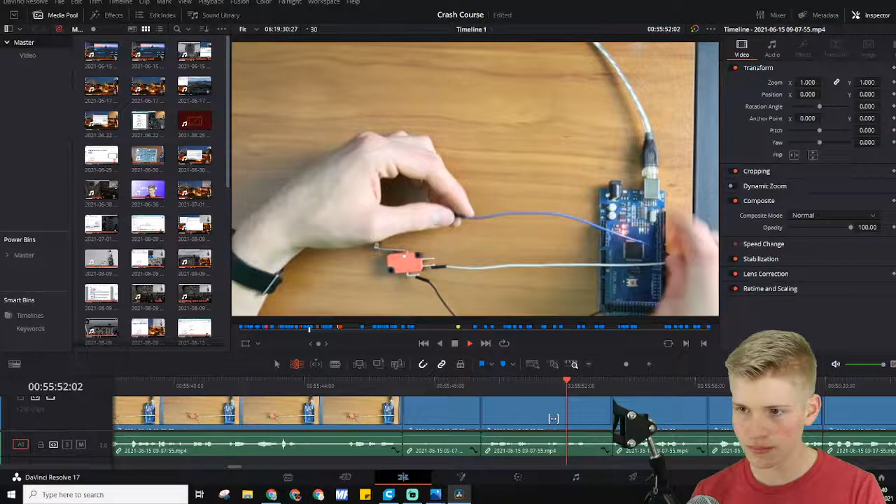But yeah, I'm really excited to launch the course. I can't give any deadlines. I did give a deadline a little ago, and I think I missed it because I said the 25th. It's really difficult to do a video like this, and I admit I'm not the best at keeping deadlines for large projects like this. I also said that I would get a 737 simulator done in 3 months. That was kind of a laugh, too. That was hilarious. These things take time.

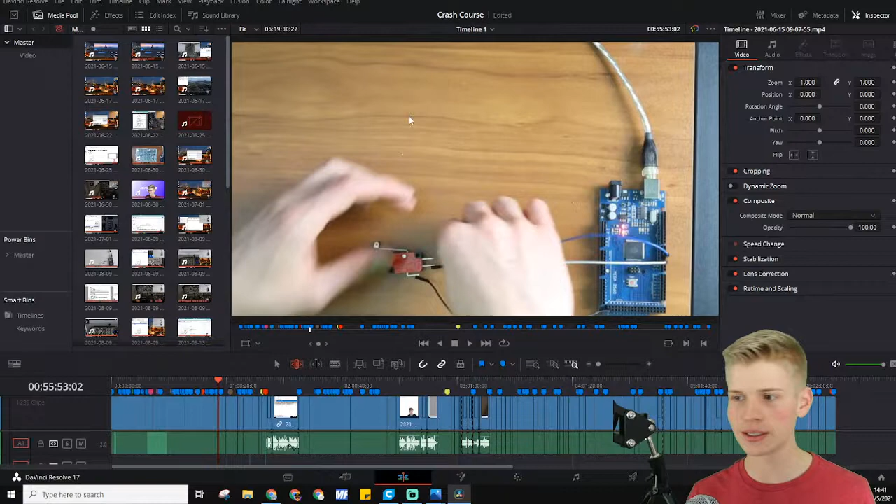All right. Oh, I was gonna pull something up. This is good being live. I enjoy this.

Oh, and for the crash course, I just showed the 6-hour crash course. I'm thinking about doing it as one big video initially, and then also having a playlist that's all split up. And I think that'd be the best way. So you don't have to watch the entire 9-hour video or 6-hour video. You can also watch it broken up into a playlist. So I'll be doing both of those. It'll be pretty interesting to see how it goes.

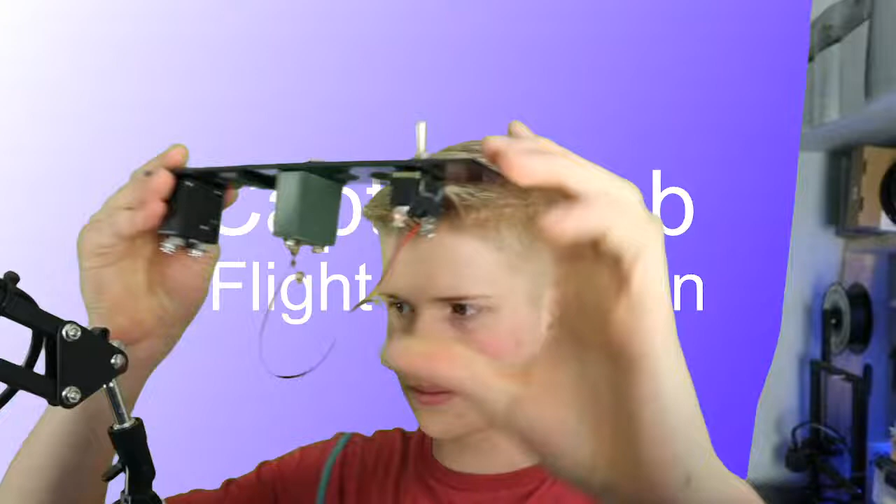Let me give you a progress update. I think that's really where these live streams shine. So this is what I've been working on most recently. Let's see if we can get it to focus. That's okay if it doesn't want to. But this is a circuit breaker. There are 4 types of circuit breakers. Actually, this one's a switch. It doesn't count. So there is the actual aircraft circuit breaker.

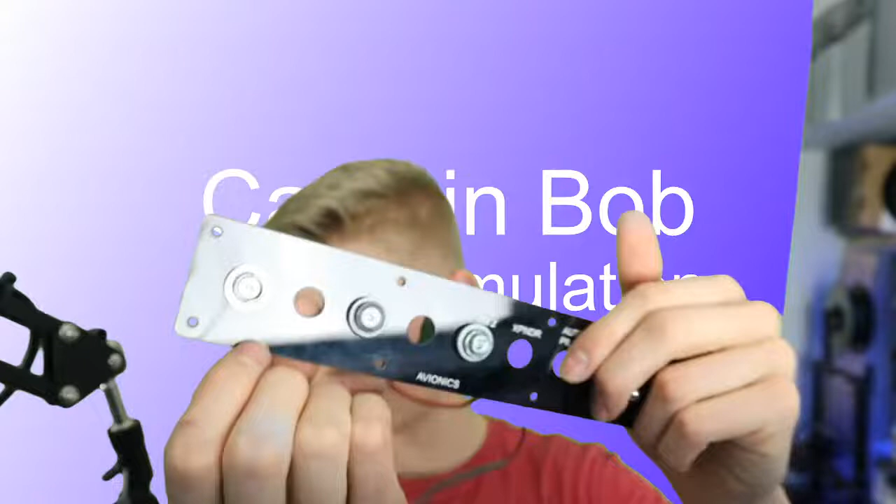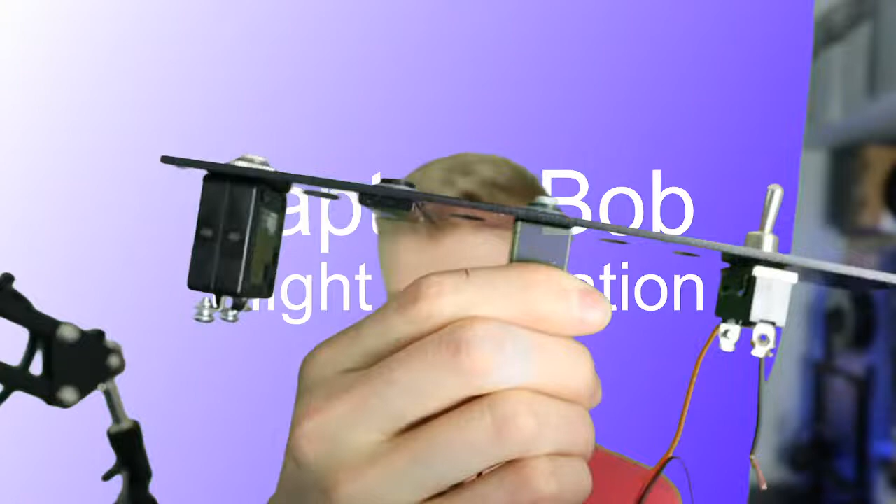I'm going to hook this up really quickly. How do I do that? So I have a 12-volt power supply. I'm not going to show you how I'm hooking it up because you will be disappointed, and I don't want you to try it at home. No, it's safe because it's 12 volts DC. Even if you did touch it, you would be fine, and it's a low amperage. It's not the voltage that kills you, it's the current.

So, once I plug this in, I have this all hooked up and stuff. Oh, that came unplugged. Let's get this over. There we go. So here is the solenoid switch circuit breaker. So this is popped out when it's up, and then when I turn it off, it pops down. So you can see it from here, pops up and pops back down.

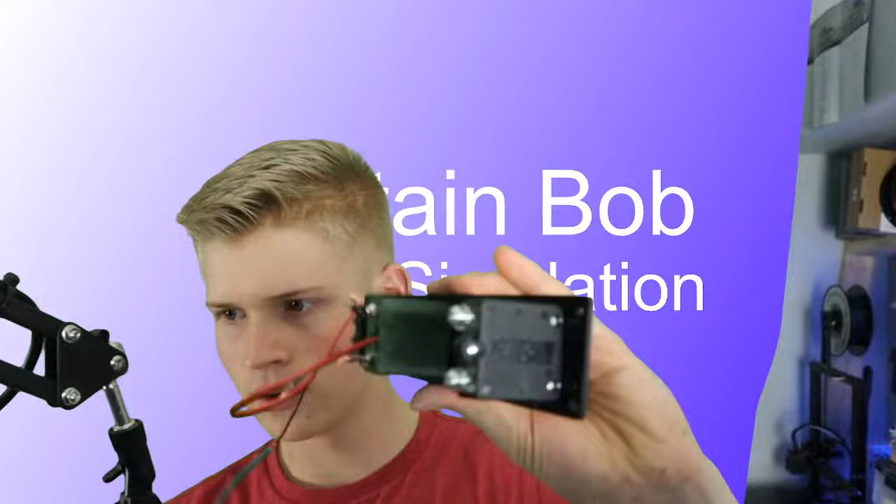This is 12 volts. It's kind of a weak solenoid, to be honest. So you can overpower it, and that is actually by design. You should be able to pop it in. And one of the things I really like about this design, it's unplugged, don't worry, is these 2 screws on the back here. These 2, okay, it focused now. But these 2 circuit breaker screws actually go to a contact.

So, just like you can contact me on the About page of my website, you can make contact with these 2 pins. I'll hook it up to a voltage meter, or a multimeter. I'll put it on a tripod, and we'll show you.

Every live stream, I say, I don't need the tripod. The tripod is pathetic. And then I need it. Actually, the tripod isn't even pathetic. I'm just ignorant. Let's see. You know what? This is good enough. We'll figure it out. I don't want to keep you waiting. I say as I keep you waiting. Also, do you like my quote in the description? I took a while to come up with it, and I think it's really funny. So, we are... Nope, not that one. This one.

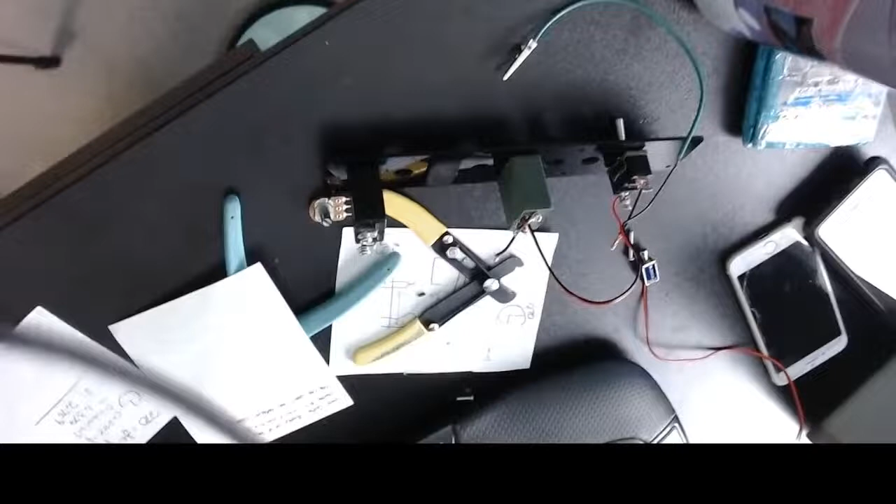So this is what my studio looks like for any of those who are interested. And we'll get you these circuit breakers. There you go, and you can even hear me. Alrighty, and we don't have any sandbags on it or anything.

Alright, I lied. I will show you my wiring. So you get this, and then you plug this into here. Turn the power off, plug this in, and then the other one first. Let's see here. So, we can get our multimeter that I put away, because I put this away and put it back together like 10 times today. I swear. So, you can just connect these leads over here, if it'll let me.

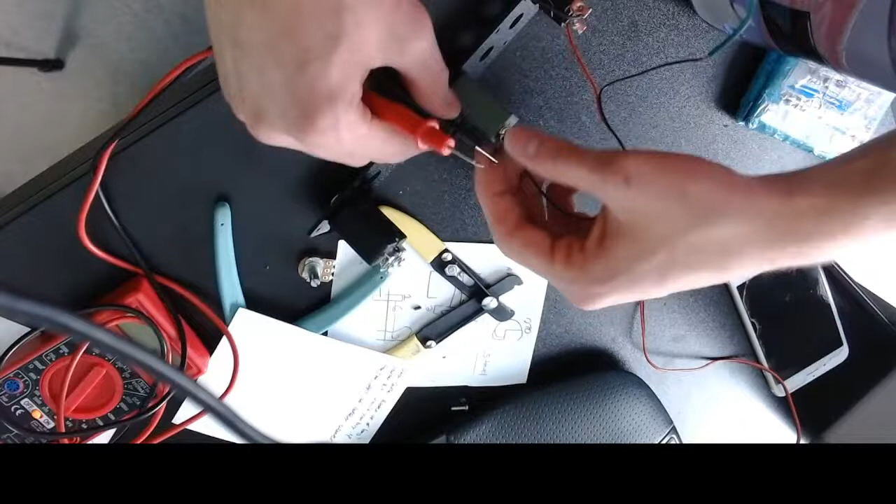And now, where is it? Alrighty, here is the moment we've all been waiting for. Right now, the solenoid is in the, I forgot, position. But right now it's sticking out. When we press it in, what should happen? The number changed, so that means it's receiving a signal. So this circuit breaker acts as a switch, or a button in a way.

It sticks sometimes because of my mechanism to make sure it goes in straight, basically, and doesn't turn the letter or the number. It's a half solution. It doesn't work very well. But you can see that you press the circuit breaker in, it sends a signal over here, and then the program would make the circuit breaker shut off. So then the solenoid would basically remove power. So this is how it would go. You'd program something in MobiFlight.

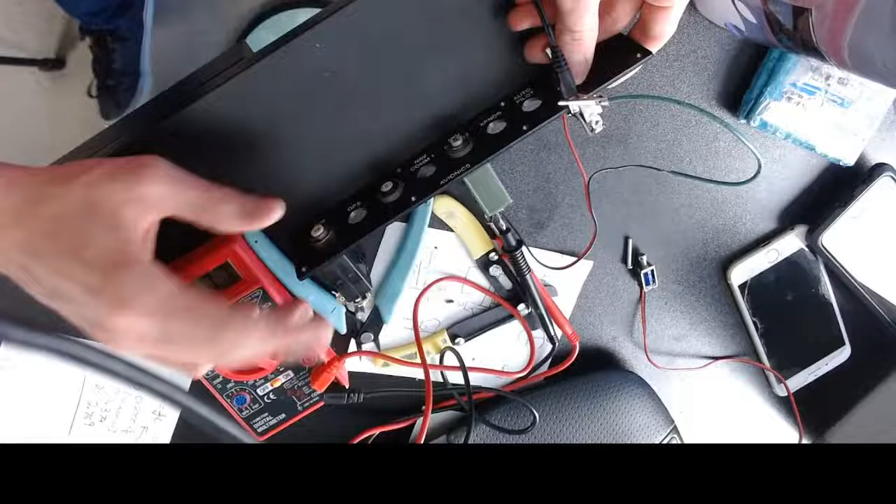Oh, you can see my foot there. Program something in MobiFlight. Circuit breaker would pop out. You'd press it in. This would send a signal to MobiFlight and tell it to give the circuit breaker electricity, basically, to make it go back in. Because if you don't have the signal, it auto pops back out because it's just being told, go out, go out, go out. So this is my locking mechanism.

I really can't wait to see where it goes. That's what I've been saying so often the last few days. But yeah, there we have it. That is my mechanism. What I'm doing right now is making this less janky. That's a lot of what I'm doing. So basically, instead of using this 12-volt power supply and pressing a button, I'll be using very cool relays with MobiFlight.

So, what is a relay? Glad you asked, hypothetical viewer. Which one is it? This one? A relay. Isn't it like a relay race? No, that's different. A relay in electronics is one of these guys. So it's basically a cube of voltage. I've been working with these a little bit. So basically, it has some contacts over here and some contacts over here, and you shove in voltage that's super much, and you switch that voltage with a voltage that is not as much.

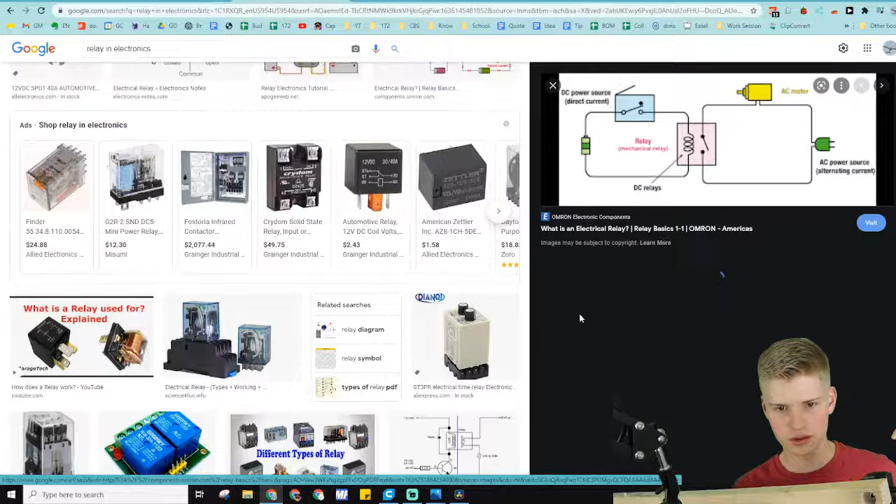But basically, you take a lot of voltage on one side of the circuit and not as much on the other side of the circuit. So here's a DC power source that powers the relay, and then you could have an AC motor on the other half of the circuit. So you're basically separating them out, so you're not running 12 volts through the Arduino. That is the exact application I'm going for.

So, where is it? So this Arduino right here, if I hook it up to one of these pins, and have these pins power the Arduino, the relay, if I have this pin over here power this solenoid, then, my friend, that would be not very good. The solenoid would not have enough voltage to pop out.

Very nice. So, if you have this voltage over here, where was it? Yeah, if you have this 5 volts over here, you could basically power a relay, and that relay can trip from 5 volts, and it can power something that's 12 volts. This looks very messy, but it's a lot more simple than it looks.

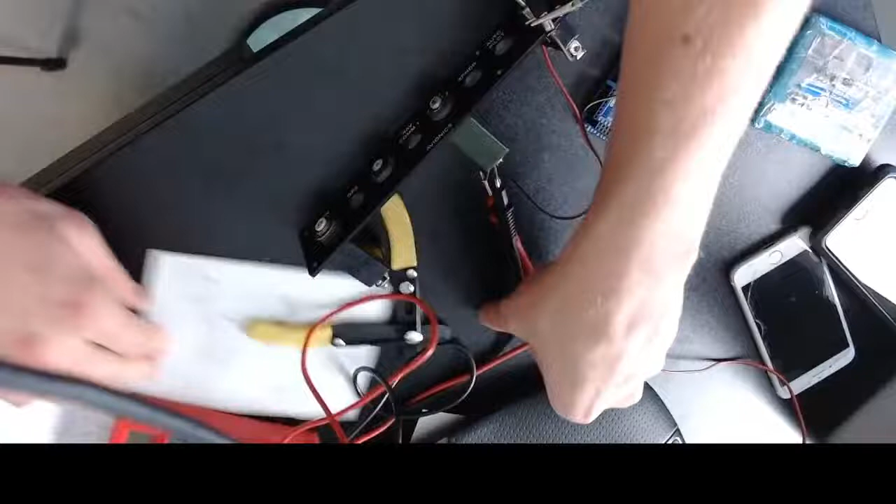Sometimes I guess I just work in a mess so it looks like I'm productive. Is that kind of how it works? There we go. This is a little more manageable.

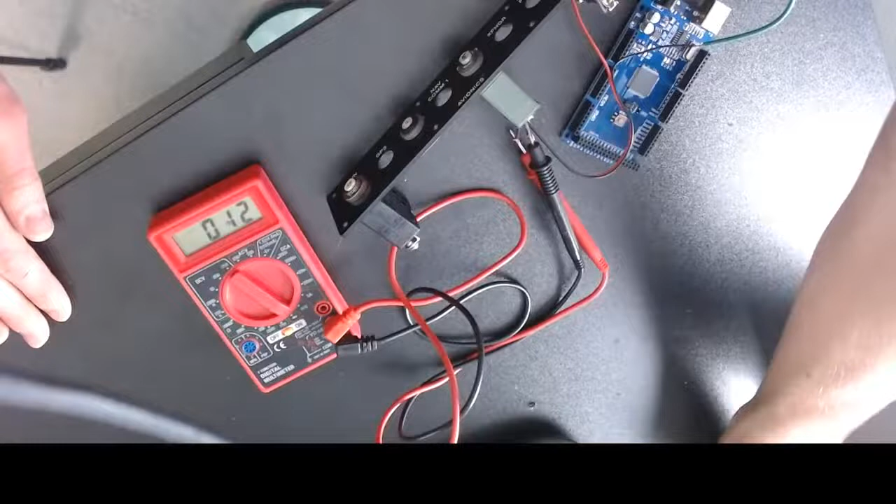But yeah, so instead of having to get a 12 volt Arduino, I don't even know if those exist, you'd get a 5 volt Arduino and put it to a relay, which is pretty cool.

Alrighty. Sweet. We have some more things on the agenda. This is like a meeting with all my stakeholders. Great job holding the stake. Let's see. I was gonna just complain a bunch, not gonna lie, but then I was like, but it was mostly just me venting, so we won't go over that.

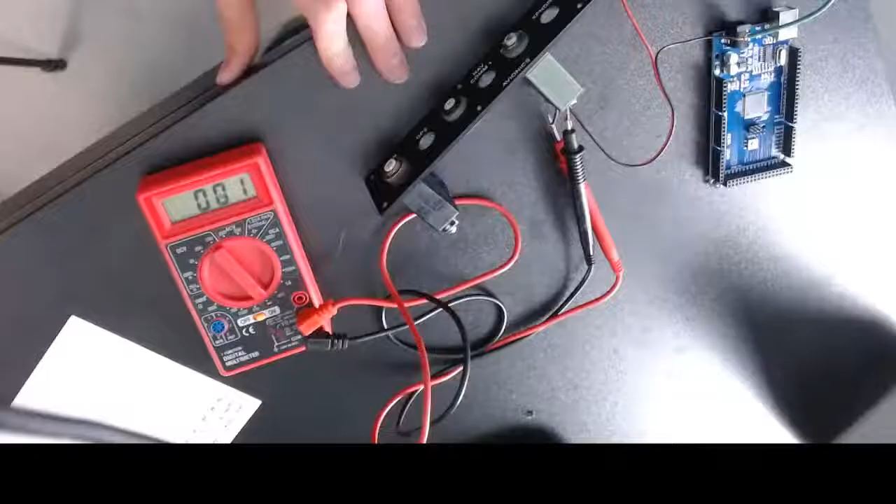Anything else? I'm actually really considering buying a power supply though, because this is super janky, and B, I want to see what voltage the power supply or the solenoid pops at. So yeah, it's fun.

Oh, I forgot about the CAD drawings. So, in the world of Fusion 360. It takes a while, don't worry.

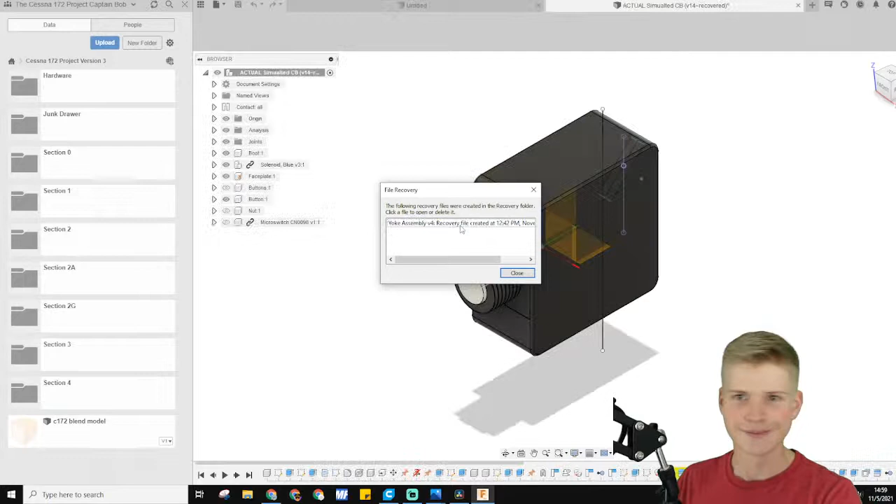Let me put this away. It's like a limbo bar. Ooh, it looks like we have some zesty recovery files too. Tasty. Looks like someone didn't save their design.

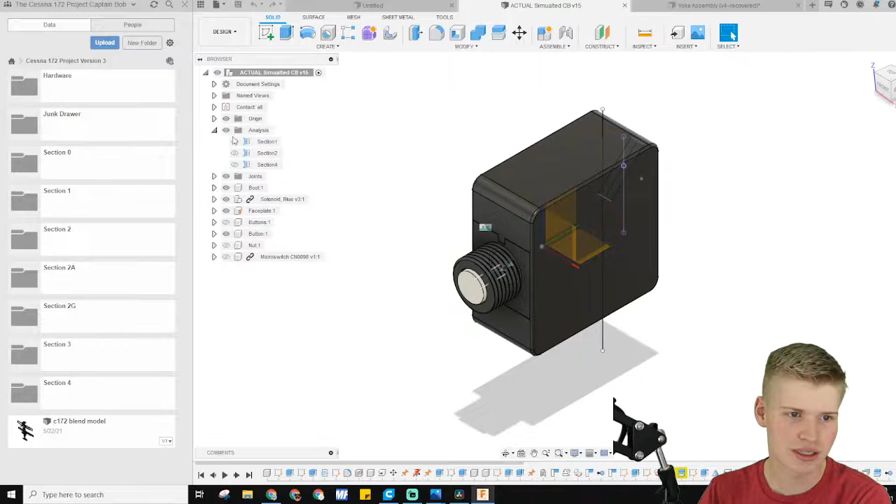That's awkward. So here is the circuit breaker. I want to show you inside the circuit breaker because the outside is cool and all. Has this fancy thing that goes up and down, makes the poppy noises. But it's cool to see what's inside. So right here we have these section analyses, but we have something. I don't know why I made that voice. We have something super cool in here.

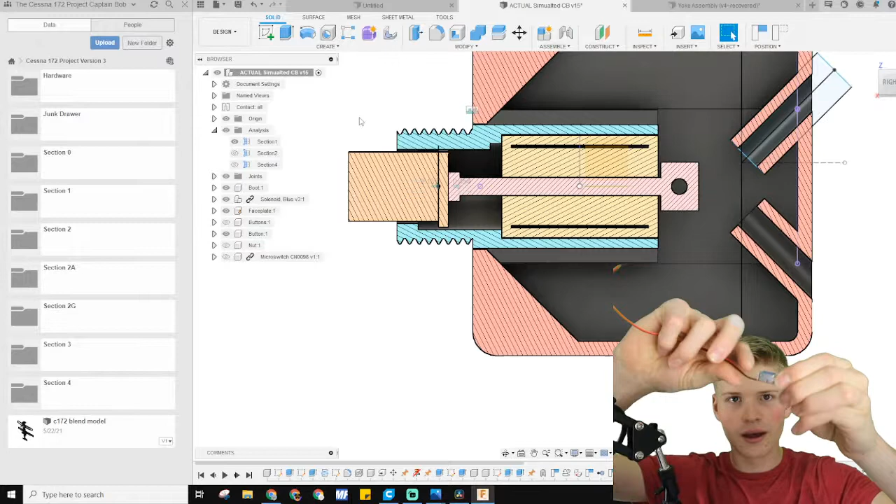We have the solenoid over here and the cap. So this solenoid, I'll get one, is like this. It's a little goofy thing, and it basically shoots out a rod a little bit. Oh, wrong way. When it's on, it shoots out like this, and when it's off, it pops out like that.

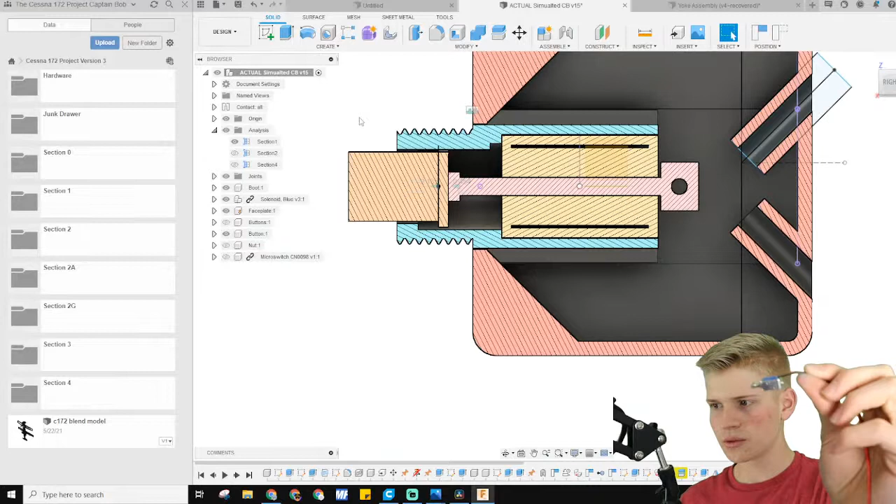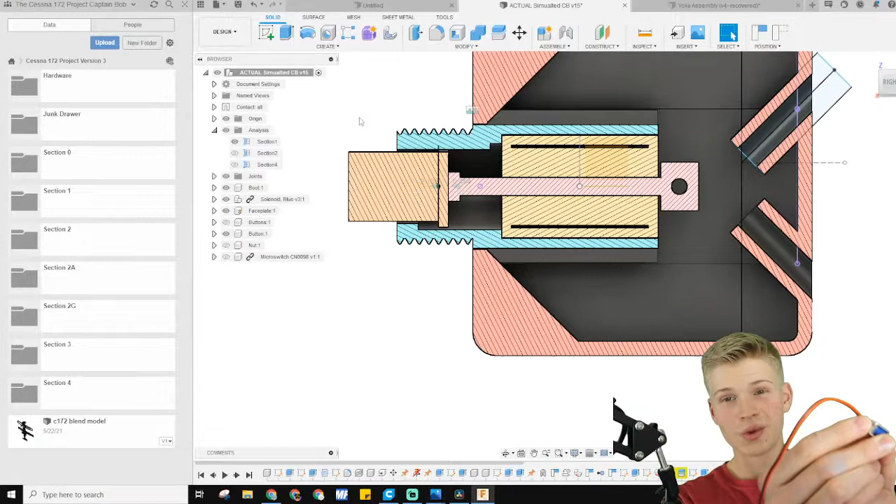So, because this solenoid is technically backwards, it springs out when it's off, and it gets pushed in when it's on. I just reversed it like this, and that way, when I press it on, this little guy pops out over here. Whoop, this little guy. And then when there's no power, it's in. So it defaults to in instead of out.

And that's why you see this little hammer thing being bigger than this one. So it's basically backwards, but that's intentional. What a concept. So, alrighty.

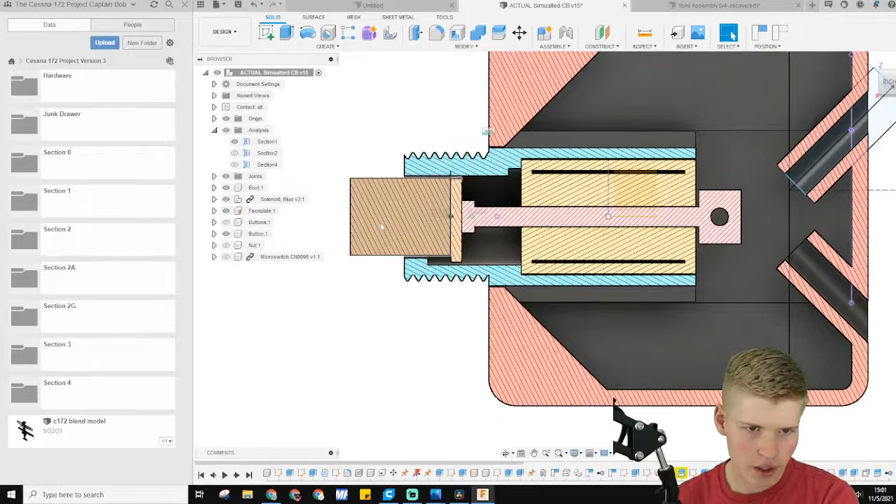When we press the button, we also press the solenoid, and we overpower the solenoid until it hits this position. And from here, there are going to be two screws.

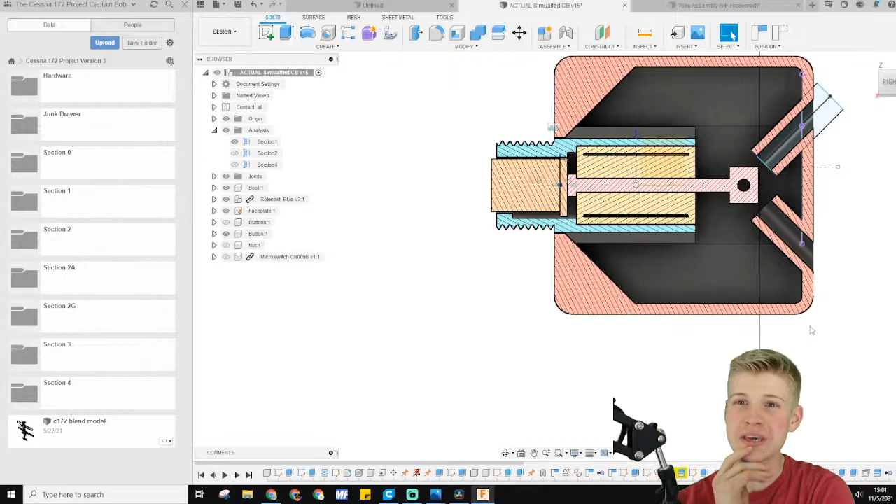So you'd imagine a screw here and a screw here. Why are they at 45 degrees? That was a design I chose to make because I realized that if you have it straight, like this line over here, it's harder to get perfect, I feel like. I could try some trials just to make sure I'm not making anything up.

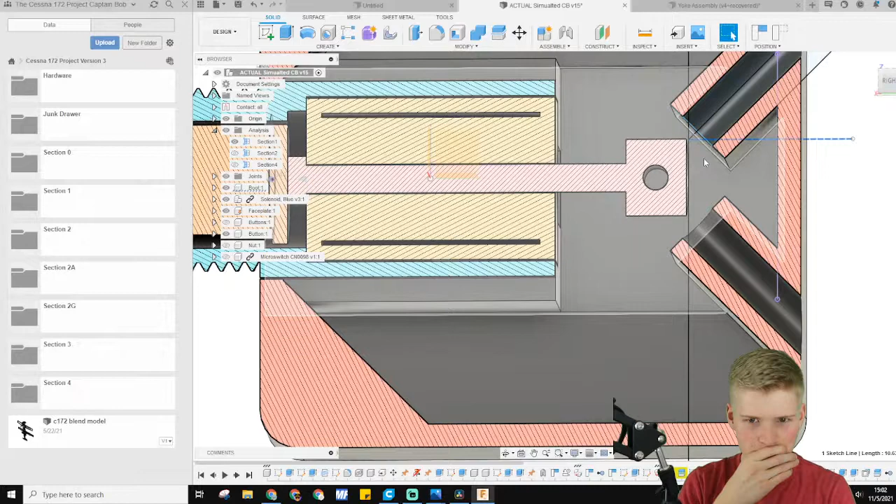But I feel like when you're trying to get both of the lines straight, there's a lot more surface area, so you have to adjust them finer to get it right, and if you go too far, or not far enough, it's a little weird.

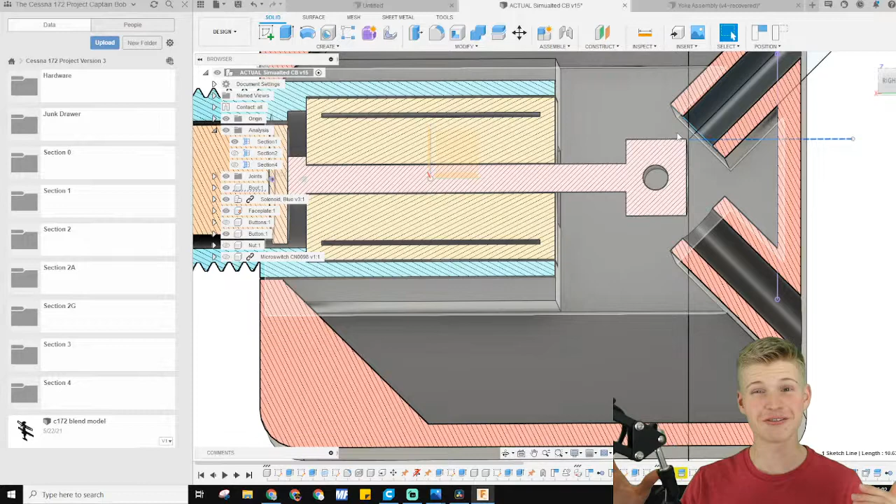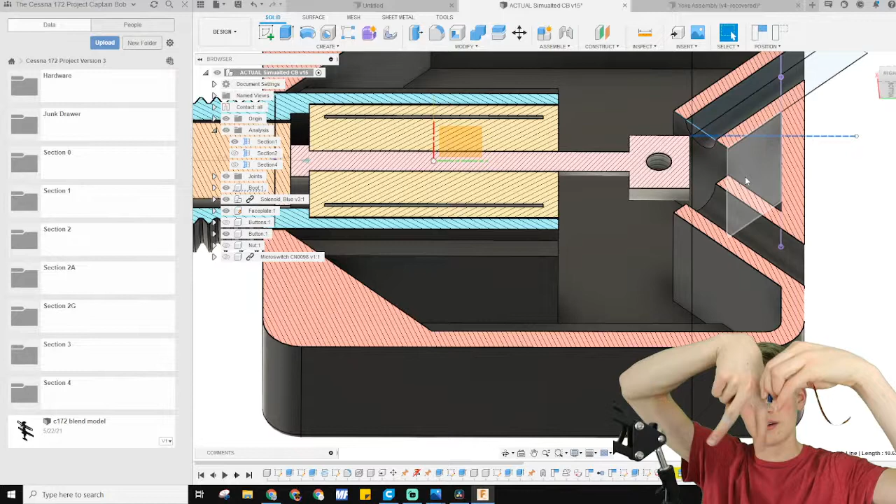It might be, now that I think about this, I don't know if I have a reason for this design, so I might go back to a design like this. But what the 45 degree angles allow you to do is make a V, and then you have the V's touch the circuit breaker, or the solenoid.

So basically what we have here is a switch. You have a screw coming in through here and a screw coming in through here, and what I like to say is, if you can't make it perfect, make it adjustable. It's not what I like to say, it's what someone else smarter than me likes to say, but we take the wins where we can get them.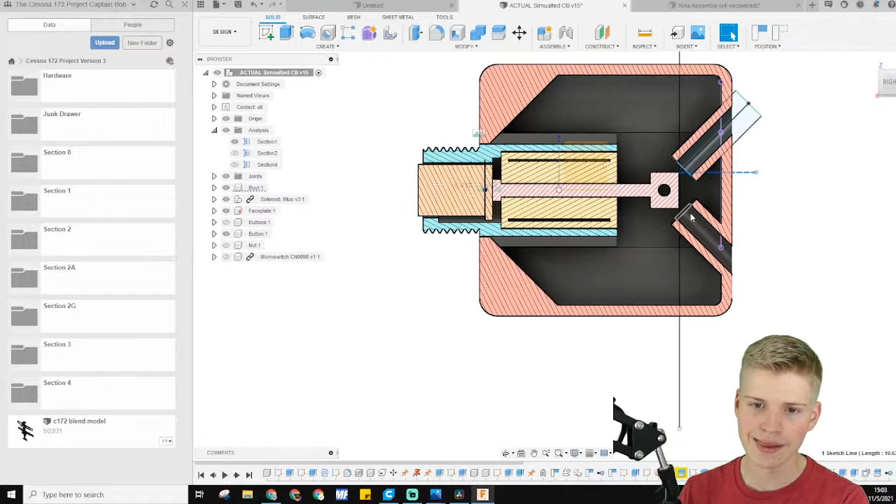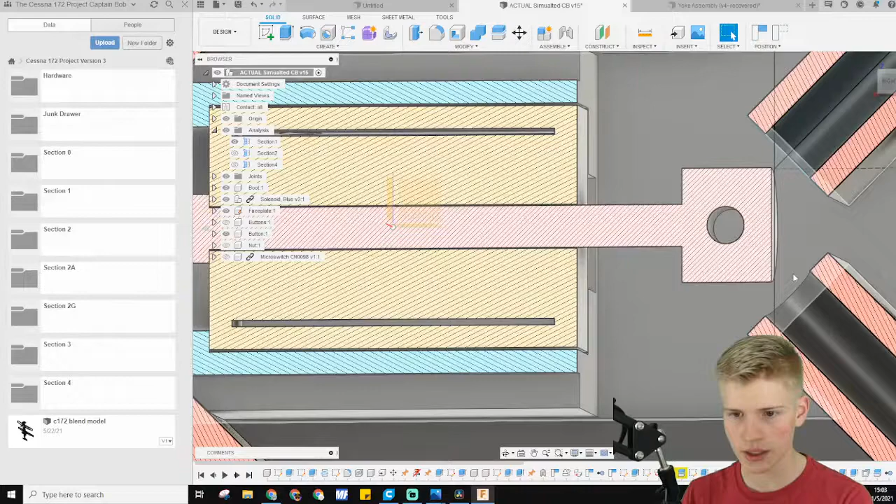So when the solenoid is out over here, this is disconnected from these little things over here, but when it pops back in, the thing goes from here all the way to this metal head over here, conducts electricity, and goes back to the down position.

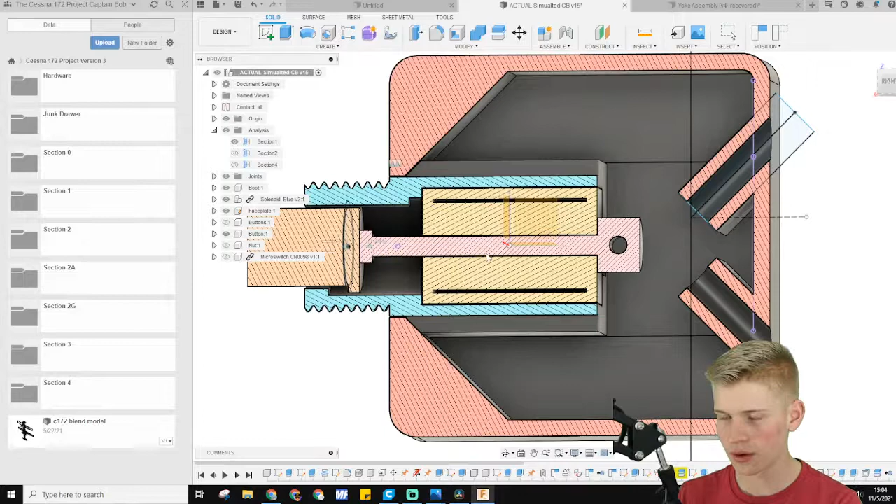Basically the current travels over here or over here, I don't know which way it wants to, but the current travels, and when it's in this position, it's on, and when it's over here, it's off. This is cool because it only triggers when it's like this.

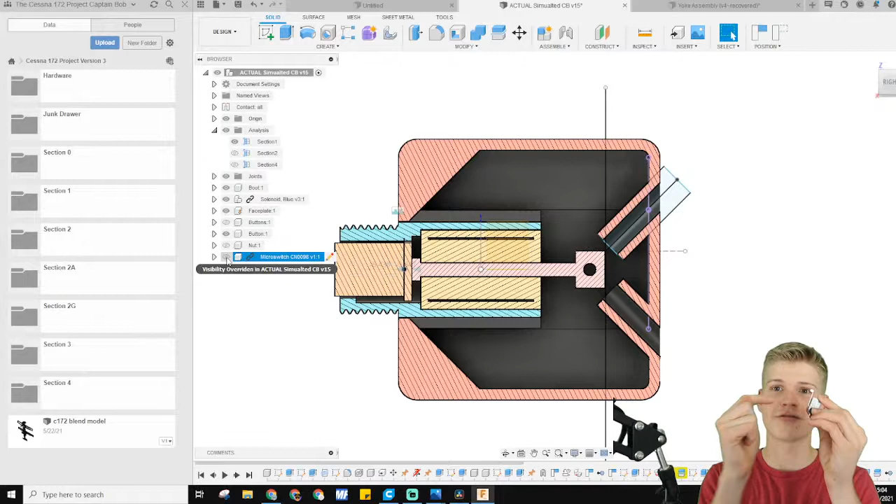That's pretty cool. I was also playing around with a position indicator like this, where you would basically tell it when it's being pressed in, and that kind of worked, but I really didn't like it because you'd have to have pressure to click the switch. This is a no pressure switch.

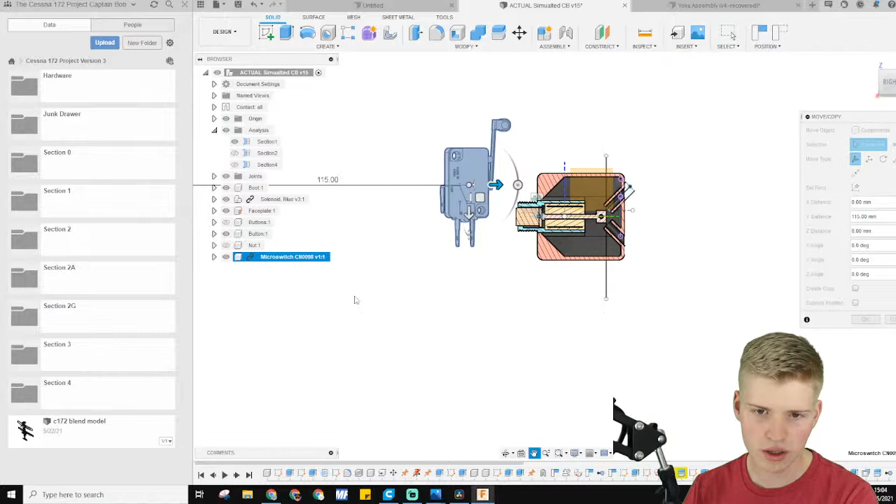No pressure, nothing. But if we see the micro switch, it is huge. If we move it over next to here, it takes up quite a bit of real estate. If I grab this real quick, we can see just how much real estate it takes up. It's like half the switch. It doesn't even fit inside the casing.

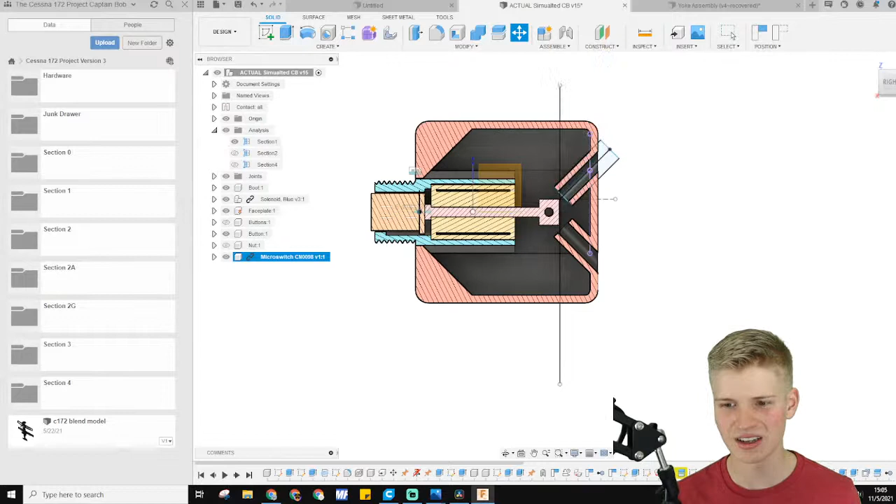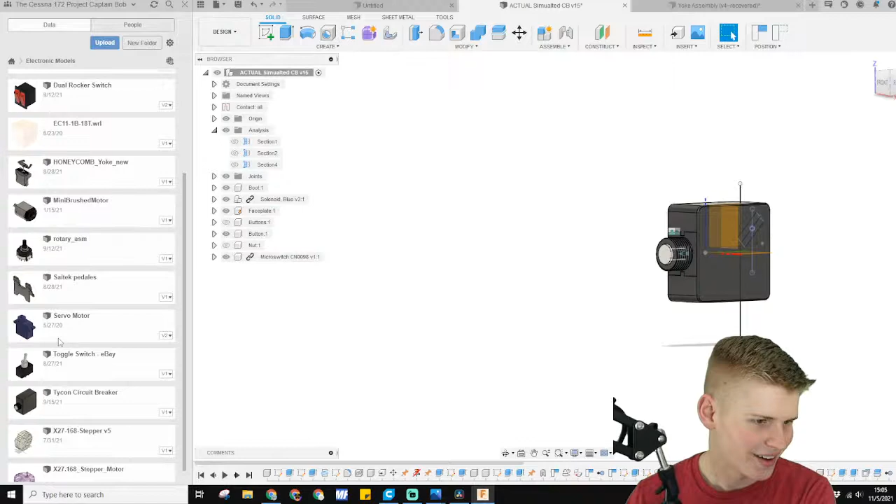And why did I want this casing so bad? To be fair, I don't know. It does look cool, and it looks like the actual circuit breaker. If I have section 2, let's see, where was it? No, I think it was under hardware. Actually, it was under electronic models. Yeah, I'm super organized, always, actually.

So here's the Tycon circuit breaker. This is the real one. And I basically took the CAD model from when I designed it and put it into here. I split it into a few bodies, so there's this little assembly, and then there's the solenoid action inside of it.

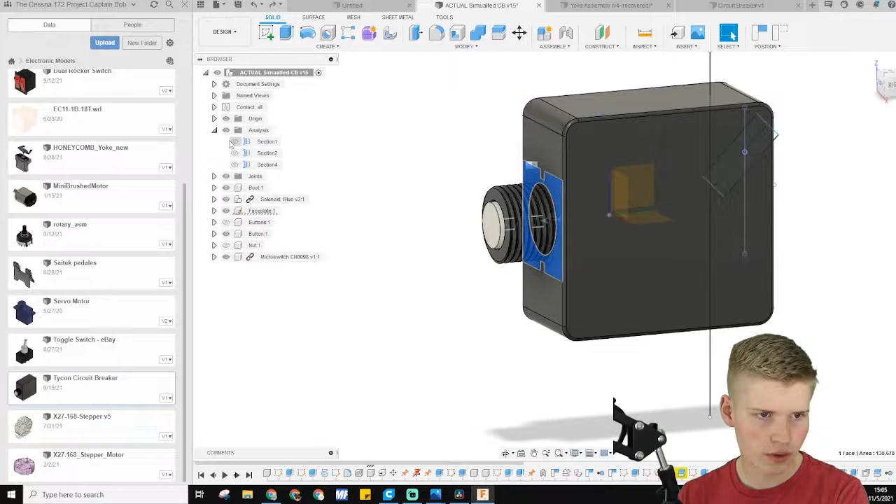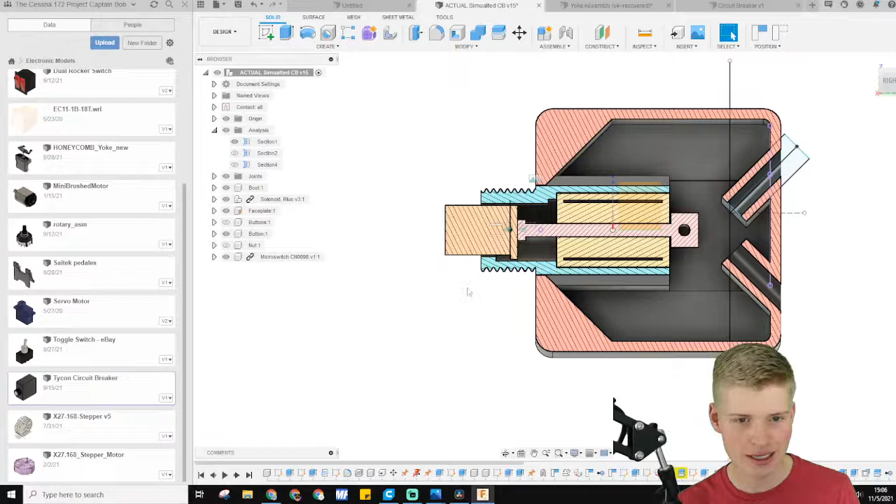I made these a bunch of parts so you could take the part and put it back together and stuff. And yeah, I think it's made in as few parts as I can practically, so I'm really excited about that. It's great. Yeah, and there's the joints I used in Fusion 360 to make it all cool like this. Vroom, vroom, vroom. Yeah, that is my CAD so far.

You can also see what else I'm working on, which is kind of fun. That was gonna be a surprise, but oh well. And yeah, alrighty, I really don't have anything else right now, but it is 37 minutes.

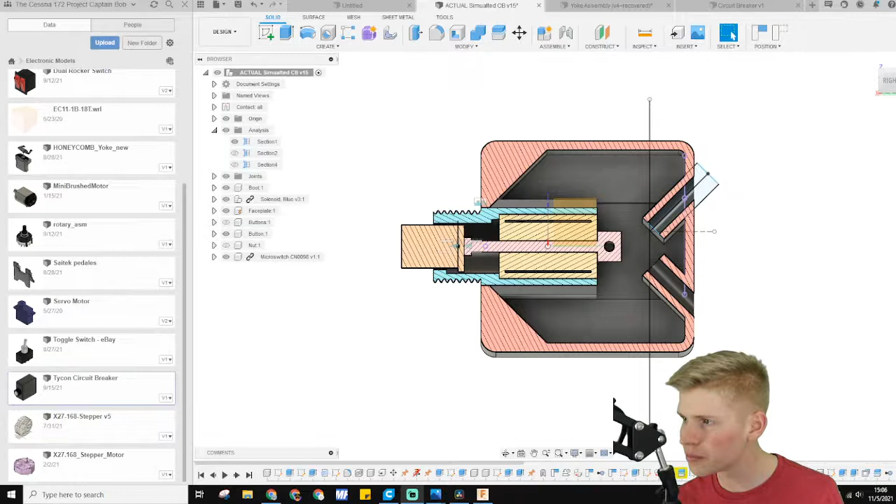Has only been 37 minutes, so let's go to the chat. Hello, I'm pilot to A380. Very nice video, thank you. That's really cool.

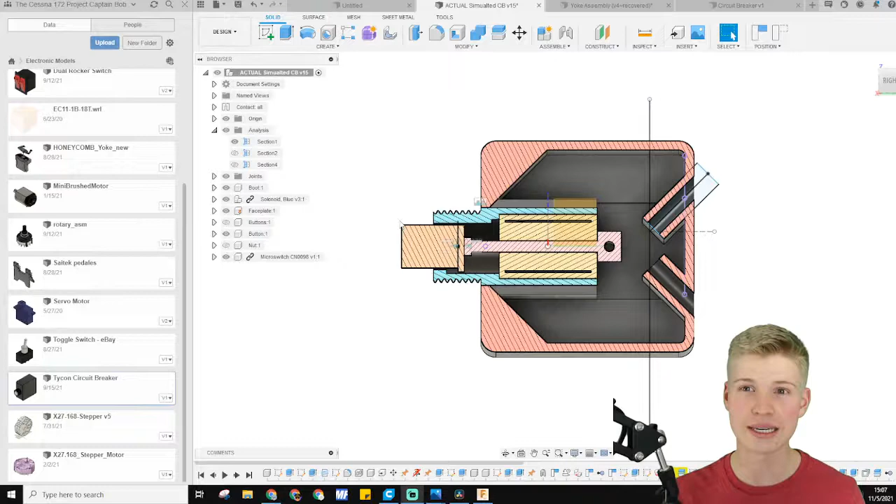Yeah, alrighty, I'm exhausted. Classes take a lot out of you, so don't go to class. No, go to class. Class teaches you addition, which is needed for CAD. So, go to class, alrighty.